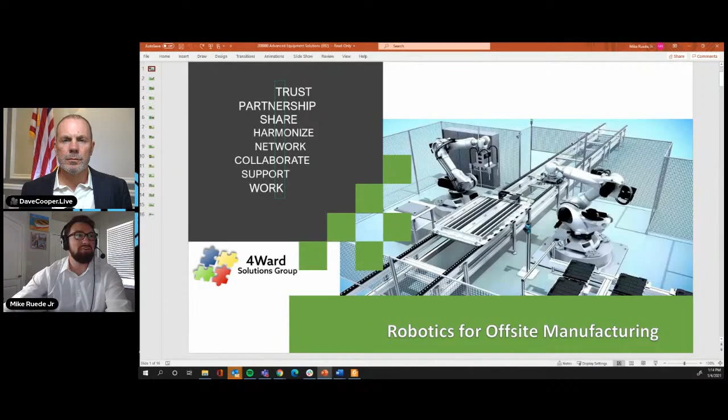And let's move on. So people talk about why they want to get into robotics and why they need to have advanced plant solutions inside of their plant. One of the biggest things is that we've had a big stifle of innovation in the component industry over the past 40 to 50 years. I think one of the biggest innovations is automated jigging on tables or laser projections onto tables, and that's how it's been for a while. It's almost been accepted that that's just where we're at.

But nowadays, we're moving way beyond that, between having more advanced equipment in a plant, cobot solutions, which is a collaborative effort between a human and a robot to complete a task, all the way to fully automated manufacturing solutions. So it's moving along, and it's coming together pretty impressively. But one of the biggest things we've got to find is the balance, and we do this for every customer - everything is very tailored, finding the correct balance between the labor and the automation of your plant's needs. Whether you're going to need full automation, just some advanced equipment solutions, or cobot solutions, that's what we're there for - to provide you with the best solution that's going to fit your plant.

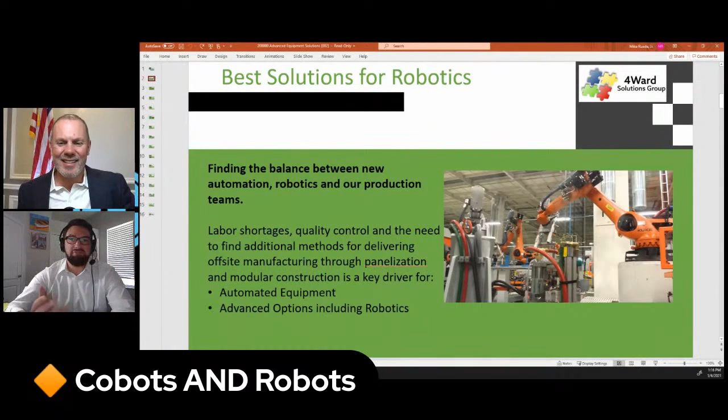A cobot is exactly that, a collaborative effort between a human and a robot, working side by side. One of the more public demonstrations of this is the Ford Motor Company with their exoskeleton suit for their plant workers. It's basically a battery pack with a cobot solution that attaches to the limbs to relieve stress and wear and tear on the individual while they're working in a plant.

That's just one example. There's multiple examples of robots helping out in certain processes in a plant, whereas a human is going to do the other parts. Got it. All right, let's go ahead.

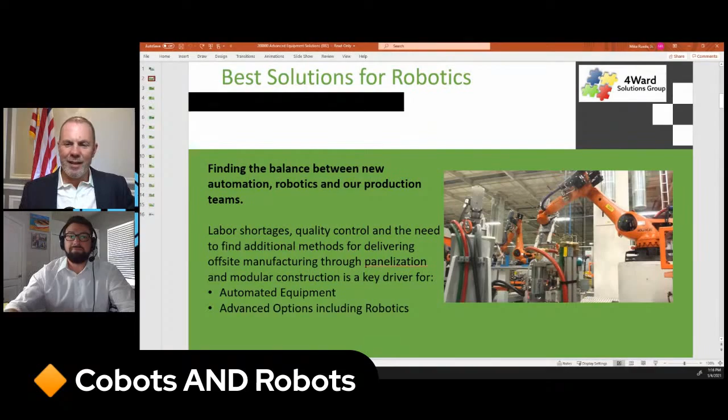So I guess we're going to talk about some of the benefits of cobots and robots in the industry. Not only from an efficiency and consistent output standpoint, you're going to get increased output, but there's also the labor solution side, the maintenance side, and the reduction in overall costs with everything. The efficiency and consistent output is probably one of the biggest benefits of having advanced and robotic solutions inside of your plant.

Everything is done by robots. Everything has to be done precisely. It just allows for easier material flow, less loss, and things like that.

As far as the labor solution, I think that's what everybody pictures when they see an automation solution. That's the first thing they see: who can we get rid of, or how do we reduce our labor inside of our plant? That goes back to the big labor issue we have, the lack of labor coming into the market, the high turnover rate, the lack of people wanting to work in a labor intensive position.

So it's making it even harder and driving the demand for automation and advanced equipment up in the component industry, because there's a big tide change between what used to be acceptable and what is now, I guess not necessarily acceptable, but what was the standard and now what is the standard.

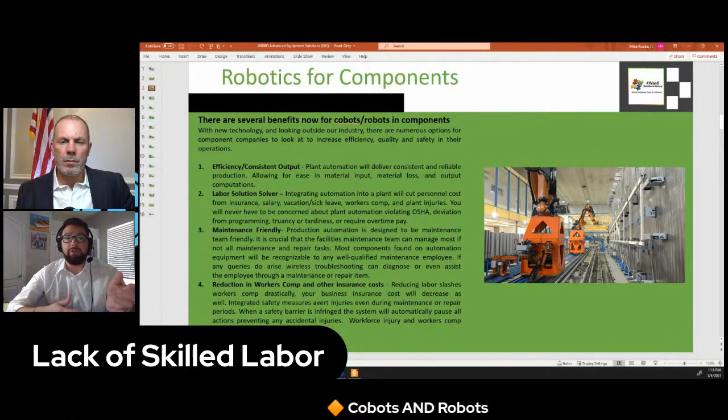And that was a surplus of manual labor, low cost for your employees. Now it's a complete shift to employees not wanting to work in manual labor and wanting to work more with automation and computers. It's a drive and a transition of how do we make the market accessible to the upcoming generation and labor force. So that's a big one.

Maintenance friendly is another big topic. A lot of the manufacturers of these different robotics solutions understand they're going inside of a component industry plant, so they want to make the equipment as maintenance friendly as possible. Most of the spare parts are readily available, commercial, off the shelf, similar if not the same style and systems that your maintenance team would already find inside of your plant.

The only difference is there's either robots or automation going into it, which ties directly back to the manufacturer of that equipment, who's basically always ready with Wi-Fi connectivity to troubleshoot and update, so that portion of your maintenance team doesn't have to really worry about it.

So there's a reduction of workers' comp and other insurance costs, of course, when you drive down your labor, you're not going to have as many workers' comp and safety issues. It kind of goes hand in hand: the fewer people you have to utilize, the lower your costs go.

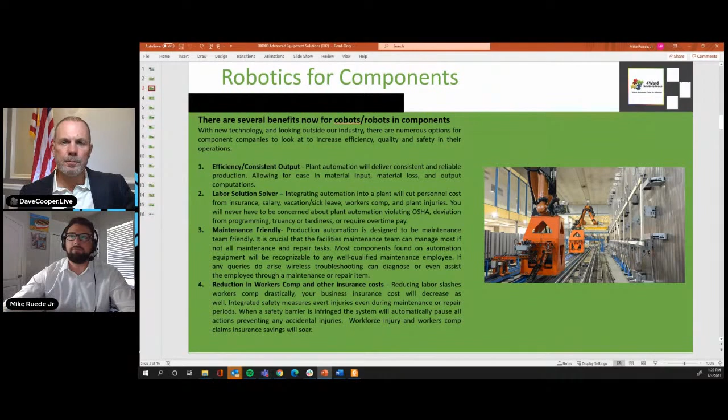If we go to the path of automated or advanced systems, robotics has been in the component industry for a little bit of time. Equipment with advanced properties or labor-relief designs developed mainly from inside the component industry, from lumber picking systems to automated pucks, tables, or laser projection. It's not a new concept for the component industry. The big difference between early solutions and present day solutions is just the level of autonomy, the ease of access, the endless possibilities of what you can do between lumber sorting, material handling and flow, assembly and stacking. There's just a big difference between what it used to be and what it is now.

From a lumber picking system to the first automated component saw or auto jig setups, one of the big things is that they were the early adopters, and then there was a bit of a stifle of innovation inside the industry. What we're seeing now is not necessarily an opposite entrance into the market, but we're seeing a lot more outside innovators and engineering or automation companies coming into the component industry, recognizing they can add a lot of benefit, as opposed to manufacturers from inside the industry who have kept a bit of the same status quo in some aspects. So it's been good because the spike of innovation from outside the industry has also driven a spike of innovation from inside the industry for equipment manufacturers.

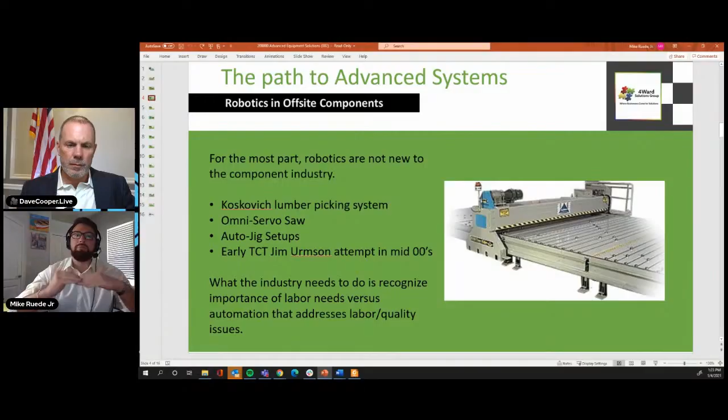I think we've been saying that all along, especially on this show. I wholeheartedly believe that a lot of the pressure and change in this industry is going to come from the outside and open the eyes of those who have been in this industry for a long time. It has, and it's a harder concept because of the lack of innovation the component industry has had over the past 40 or 50 years, whereas every other industry has just naturally progressed with innovation and technology going up. So what we've seen in the past couple of years is that the component industry has recognized they need to jump their innovation levels up, and it's a way bigger kickstart to get more innovation, more robotics, more advanced equipment, like every other industry in the country or in the world.

Right, for sure, I agree with that. I've got so many questions, but I'm going to hold them just like everybody else out there for a few moments. Let's keep rolling through, I know we have a lot to cover.

Right now with the component industry, what we've been seeing is that the productivity from the past 4 or 5 years to now is that output is increasing, productivity is increasing, efficiency is increasing with every single innovation, every single update, and it's moving extremely rapidly.

The price point is also dropping and becoming more readily available. It's still an expensive solution, but in the long term it really benefits. The ROIs are usually expected to be around 5 years. The benefit is that you can always offset some of that cost through labor reduction, efficiency output, or adaptability within your plant. It just comes down to how you're going to be using your plant and what you expect out of your solution to really get the best out of it.

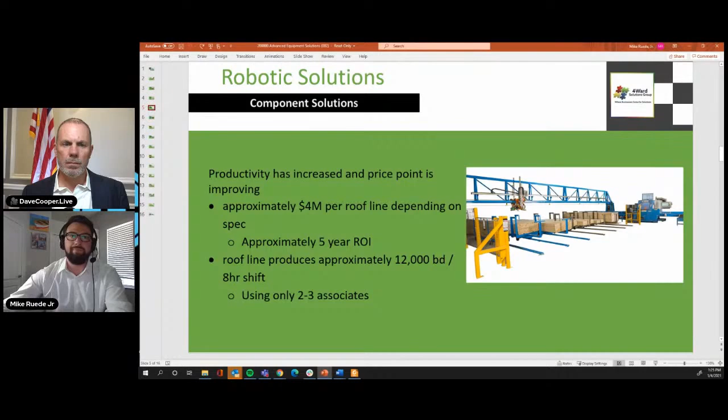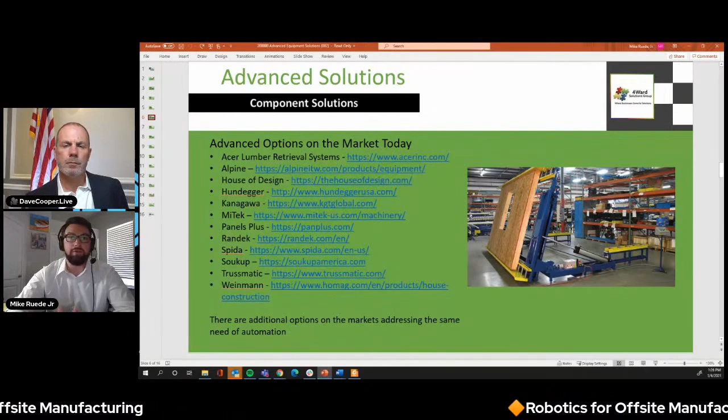There are tons of companies doing automated solutions for our industry. There's a few that a lot of people in the industry are very familiar with. We'll start with MiTek and Alpine, equipment manufacturers within the component industry. You have the Acer lumber retrieval systems. Newer ones are House of Design, Trussmatic, Randek, companies like that who have come, not necessarily from outside the industry, but some of them have, and really sparked a level of desire to have automation and advanced equipment inside their plant. Each one has different solutions, whether for roof truss, floor truss, or wall panels. So it just depends on what our customer is looking for to fit their plant.

Yeah, for sure. And it's funny, just having some recent conversation on this.

I've learned that a lot of those companies will actually collaborate and work together, or you'll have a mix and match of different machineries based on the needs of the client and based on the price point as well. Is that accurate? Yeah, it's super accurate.

The most public or most recent one is House of Design working with Alpine for their roof truss system. They've been a great collaborative effort. I think they've been a huge spark in people seeing a different side of automation inside the industry.

They had a really radical design where, if the machine ever was to completely go down, you can just move the robots out of the way and build on a manual table. That was a very innovative thing from automation, since a lot of people get a little timid or afraid of introducing a fully automated system inside their plant, thinking, what if the machine goes down? Then I can't build any trusses, or I can't build floor trusses or wall panels.

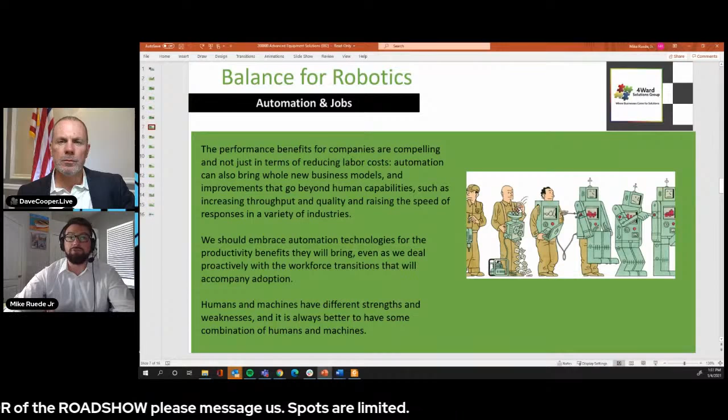All right, yeah, I mean robots and humans all have different strengths and capabilities. Sometimes a cobot solution is better than a fully automated solution, or a human can do something better than a robot can. It's still always about finding that balance.

Yeah, well Mike, I always say business is easy until people get involved. So yes, right, absolutely.

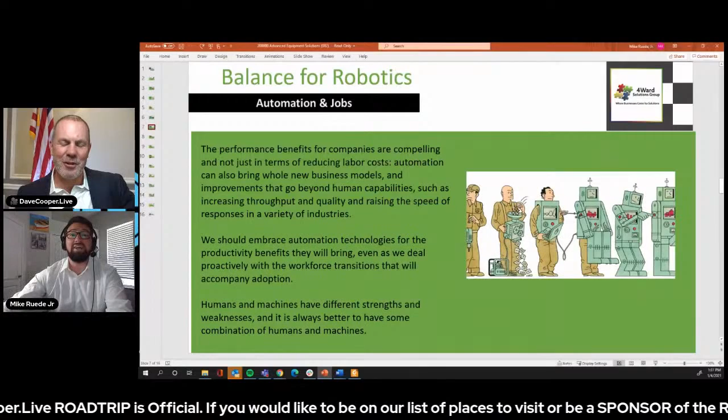So the value proposition of the investment is always doing the same task. The biggest benefit for robotics has always been that they do the best when it is the same task, repetitive, less variation, less change. So the longer the production runs, the more understanding of a plant aids the solution they have in their plant.

It's all about the adaptation part of it. If you adapt your plant a little bit to allow your automation to run more efficiently, then everything is going to run more efficiently. If you're less adaptable to change, you might restrict your solution a little bit. So it always goes back to that balance factor.

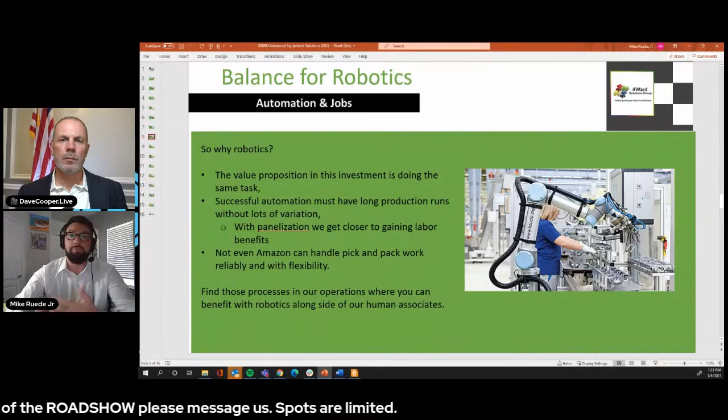But it's not necessarily always a lights-out plant solution. Sometimes component manufacturers need certain aspects inside their plant to be modernized or automated—like material handling, or a certain section like a floor truss machine, or jack tables. Subsections inside of a plant can benefit largely from automation, not always just the large overall big picture. Plants can benefit a lot from the smaller items.

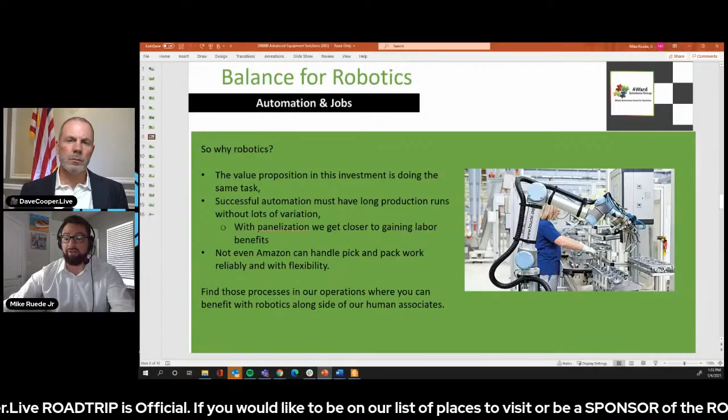So let me just ask you real quick, Mike. If I'm a manufacturing plant and I'm busy as can be right now, are there ways to plug and play automation into the line? Because nobody wants to stop the line when it's going strong, and when it's not going strong, nobody wants to spend the money to do anything different because they're waiting to see if this is the next lull in the construction industry or not. So it'd be interesting to have your take on that.

You can't necessarily say that automation integration is plug and play. There's always a level of change that goes into introducing a whole new setup inside of your plant. Some plants don't necessarily need as much change as others. You might need to change the way the table's laid out, if it needs to be moved or made perpendicular or changed in orientation. You might need to update a saw in order to keep up with the automation desires. So there is a level of installation that goes in.

Now, there's ways to progress and grow in automation by adding certain elements in certain places of your plant, definitely. And it's a tough thing, especially right now with the housing market and people having more work delivered to them than they can actually produce. It's hard to convince somebody to say, let's shut down a line and install automation on your line and pick it back up in a week.

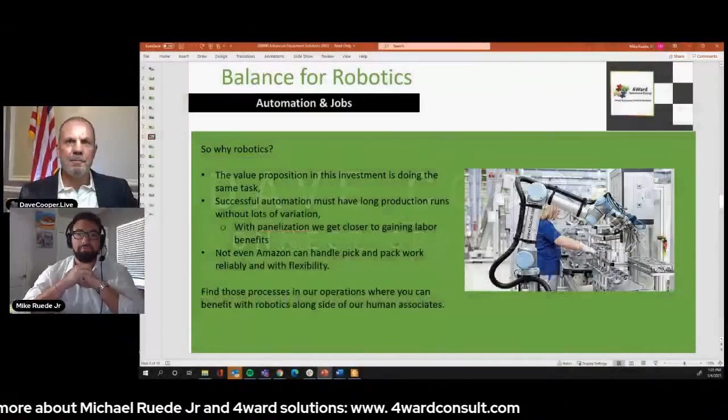As we were just talking about, certain aspects inside of a plant are either easier or more complex to automate. With the component industry, roof trusses have been kind of the image of the industry, so they were originally thought to be what we need to tackle first. It's actually one of the most complex systems to automate. There are companies that do it extremely well, bringing innovative thinking to these robotic lines, but that leaves other systems inside of a plant to be automated at an easier level.

So we were talking earlier about companies that have collaborated together—Alpine and House of Design is one of them, and this is theirs. If you don't mind, do you mind me showing a video? Yeah, go right ahead, love to see a video. So this is the House of Design and Alpine conjoined effort.

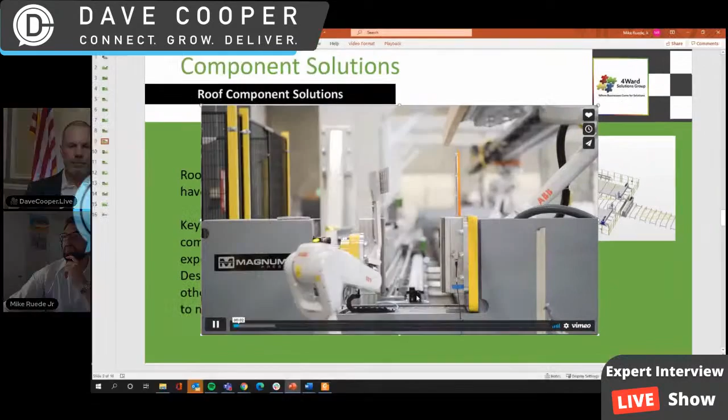I'll put it full screen. Oops. Sorry, sorry.

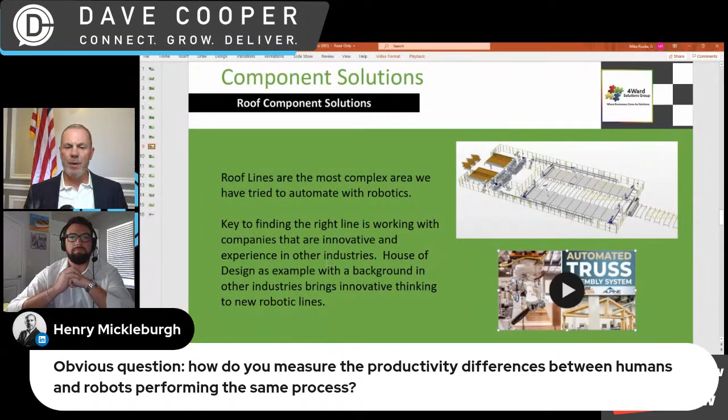I think it comes down to the cost of labor. So all your labor costs that go into having manual labor complete the task versus having the robotic solution complete the task. You try to measure your cost from the labor side, but also the output and efficiency - material handling, labor costs, material costs. You try to find the balance between what you're gaining in material handling efficiency, cutting efficiency, assembly efficiency. It's a matter of long-term efficiency, not just that manual labor can assemble faster. You're not always going to gain a direct output advantage over a manual setup. For the most part, humans can do things faster than a robot - it's the long-term efficiency and longevity that changes.

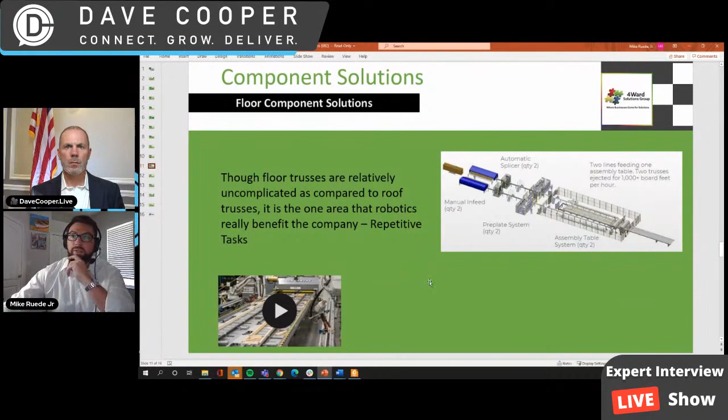So that's one area. We're also seeing a huge influx on the wall panel side. Now, we were talking earlier about the cobot solution—say inside a wall panel plant, you're still trying to put your panels onto the actual wall panel. This is where a cobot solution is very beneficial.

So say you have your stack of OSB, your plywood, your gypsum. Something that's easily benefited is a robot on the other side of the line using a vacuum system to grab those pieces, swing them around, and place them correctly, instead of your worker grabbing a giant sheet of plywood or OSB and trying to place it. So it's one of those things that can really be beneficial.

And then you go onto the fully automated side, where you have minimal human interaction, and robots will do pretty much all of the work.

Now, the cost of that is usually you will need a bigger space. You need more room to accommodate your robots, or for the different stations that they're going to be assembling and building and passing on to the next station. If you look inside of an automobile plant, it's absolutely huge, because it's basically all automated, but they create stages and stations for the robots all the way around the plant. Each robot is controlled and does one specific task.

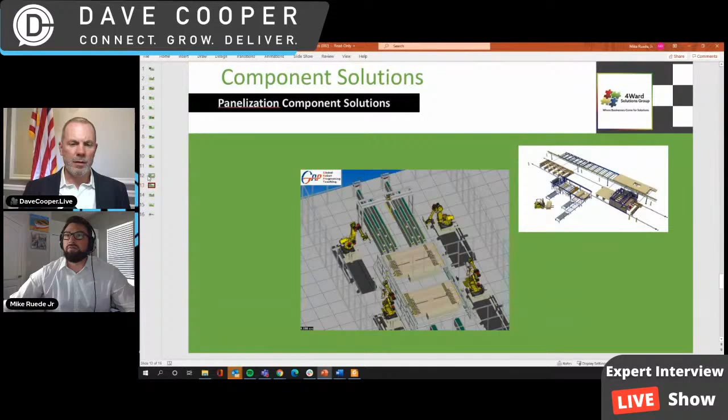So on that slide we were just looking at, is that a quick video of that happening with that automation? Previous slide. This? No, you just had one up there a second ago. It had a little, that one right there. Oh, yes, that. So this is an automated guided vehicle. Can we show that real quick? Oh, I can't maximize it, but hopefully everybody can see it.

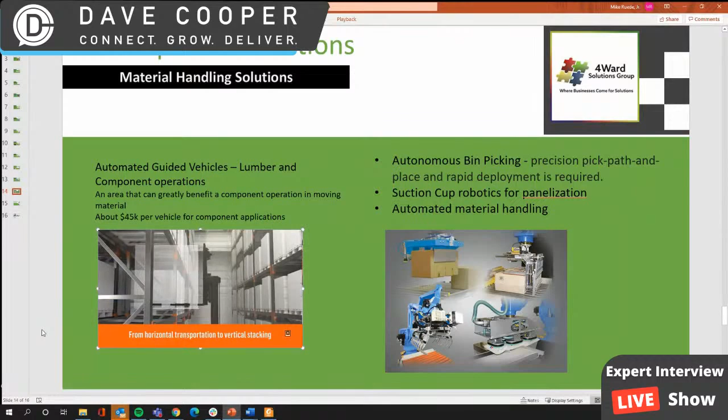So that's automatically picking and dropping and moving product from one place to another is what I'm seeing.

Yeah, and one of the biggest things about incorporating these inside a plant is people worry about personnel safety with an unguided vehicle driving around. One of the good things is that early adopters used reflective tape on the ground, basically like a movable railroad track, the robot couldn't steer off of it. Now you can program the entire floor plan inside the robot, and it knows exactly which way everywhere it needs to go. It includes sensors that sense humans, and depending on how close or far they are, it'll either slow down or actually stop until they're out of the safe operability perimeter of the robot, then it'll continue.

Very cool, very cool. All right, back to tour.